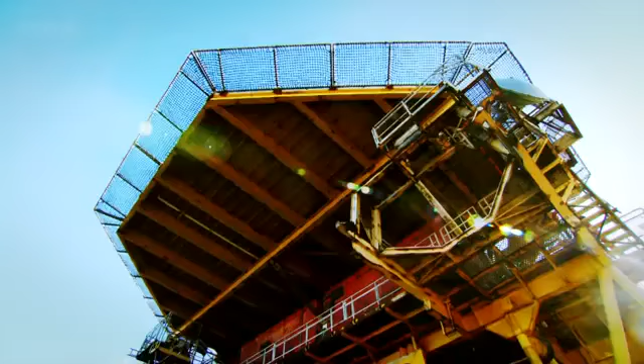This is the indefatigable Lima platform. It's the last remaining offshore rig in one of Britain's most productive gas fields.

Made up of 2,500 tonnes of steel and almost 15 miles of pipework, it's brought over 1 million cubic metres of gas up from deep below the sea. For almost 40 years it's kept us warm, supplying gas to 5 million homes.

We were the young pioneers in those days. We were the ones bringing oil and gas to the UK. It was exciting.

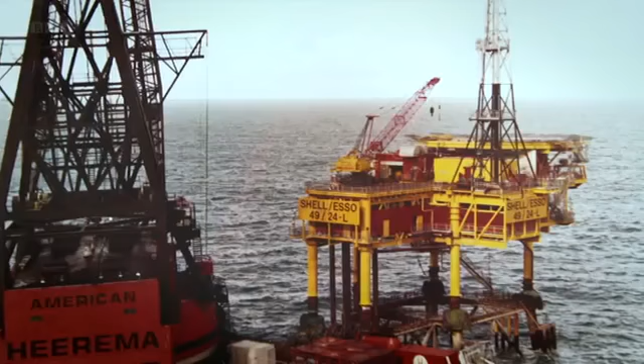Now, this giant is about to be demolished. It's going to be an immense engineering challenge. You just keep watching it and your heart's going thump, thump, thump.

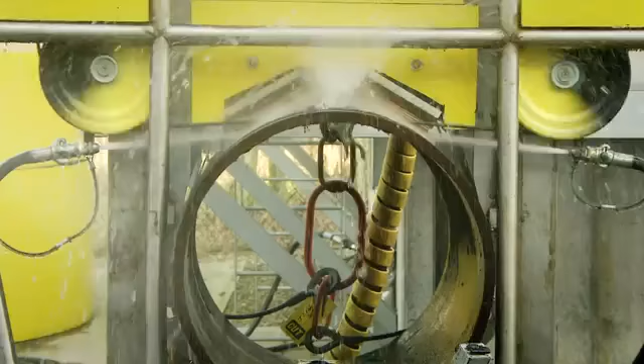Diamond-coated wires will attack 2-inch thick steel. It allows the machine to just keep cutting and slicing. Gas axes burning at 3,500 degrees centigrade will bring it to its knees.

It's an emotional time for the men who put her up, the North Sea Tigers. That's 40 years of my life, now gone.

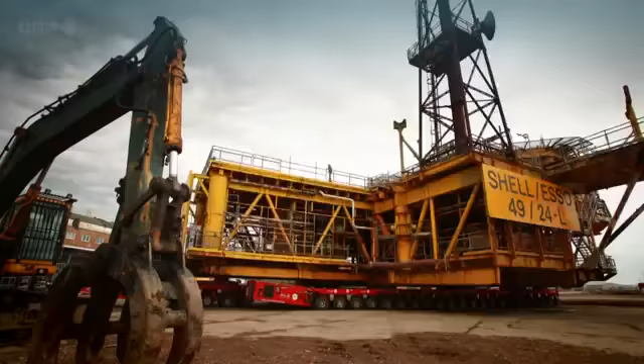Taking her down will require remarkable technical skills and will provide a unique chance to see right inside this enormous installation. Okay, could we get that hook reset, please?

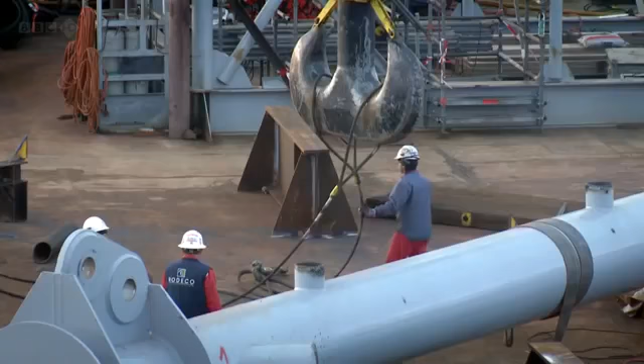Lima was at the heart of the indefatigable gas field, which was discovered in the 1960s, 70 miles off the Norfolk coast. Now the gas has run out and it's being decommissioned. The whole project will cost £1.5 billion and involve the expertise of more than 1,000 engineers. Removing every last trace of Lima will take 9 months.

I'm Rob Bell, a mechanical engineer, and I've always loved to get my hands on complex machines to discover how they work. I'm Tom Wigglesworth, a trained electrical engineer with a passion for big machines.

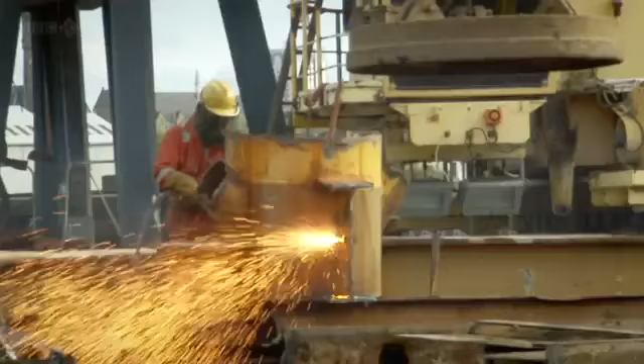As Lima makes her last journey from the North Sea back to British soil, we'll be taking you through every critical stage of the engineering process. And as she's torn apart, we'll uncover the secrets of how one of the world's biggest machines works.

Few people know Lima's secrets as well as Austin Hand. He worked on her construction at Lowestoft almost 40 years ago.

It started in Middlesbrough where it already slipped on schedule, so Shell decided to bring it from Middlesbrough down here to finish it off. Right across here? Just on a barge moored against the quayside, yeah.

Austin's come to meet 2 other Lima veterans, Bill Lindsay and Mick Needham. They haven't seen each other in over 20 years. For a long time. How you doing? I'd like to say we haven't changed much, but... I'm doing great, really. Yeah.

Probably the first time I ever come across you was on Lima. That's right. You know, that was who I am, and you were the main man.

For me, what's quite special is that you guys were the pioneers, really, of North Sea gas and oil exploration and getting the platforms out there. It's exciting, but it's a big learning curve as well for all of us.

We were only young lads. I joined Shell in 1971 as a 22-year-old, having worked in power stations, and didn't even know what an offshore platform looked like. 5 years later, I'm building them.

In them days, the southern North Sea was quite a family unit. We didn't have too many people coming in internationally, it was mainly local lads, and they kind of all stuck together. And I think these days that's changed.

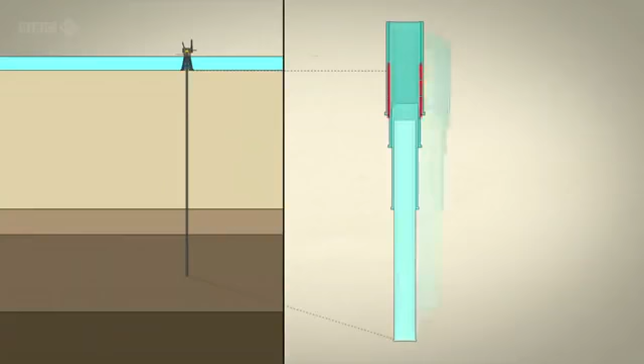Their first major job is to plug the wells and sever the gas conductors. The Lima platform had 6 wells, each tapping into a separate section of the gas reservoir 2 miles under the sea. The only way to bore that deep is to brace the well in sections as it's drilled. Each time a smaller pipe is passed down and the join sealed with concrete. These are known as conductors.

Now Lima's wells have been plugged in 4 places with cement and the conductors are ready to be cut. You end up with pipes within pipes within pipes, so you've got concentric rings of pipes. Once the conductors have been cut, you'll actually see something that's like a dartboard effect, where you've got concentric circles within each other with concrete between them.

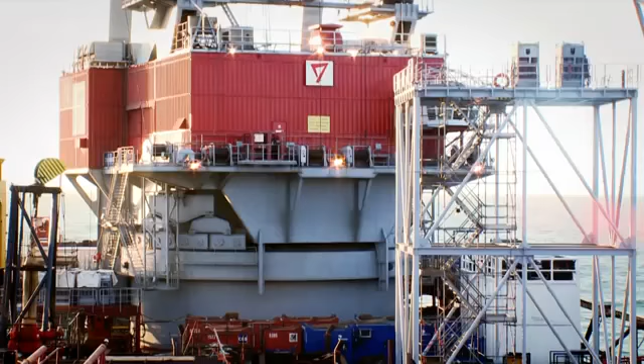Cutting through these materials would be a challenge on land. But this surgery needs to be carried out 30 metres under the surface of a stormy North Sea. Matteo Mosca helped develop an ingenious cutting solution, one of the many methods used in North Sea decommissioning.

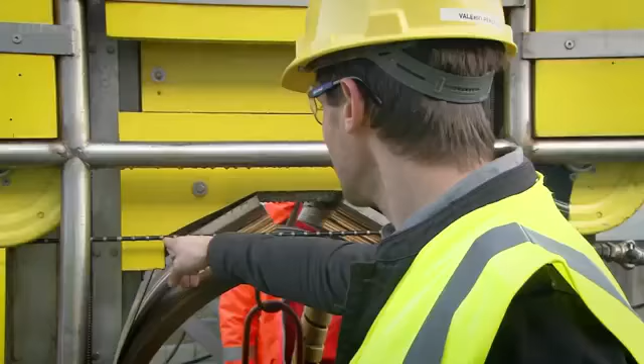So what have we got on there? On this wire, which is just a steel strand wire, you've got embedded these diamond bits, these elements which are covered with synthetic diamond. Then the wire is constructed as an endless loop, a continuous endless loop, and it grinds its way through, giving a good finish. It doesn't alter the physical structure of the metal, and locally it doesn't heat it. So can we actually see this cut through? Yes, that's what it's made for. So let's go.

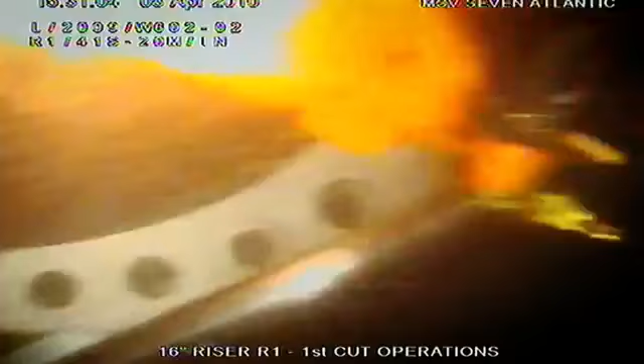Back out in the North Sea, this process is happening 30 metres below the surface of the water. These cameras help guide divers as they manoeuvre the diamond wire cutter into place. Let's get cutting.

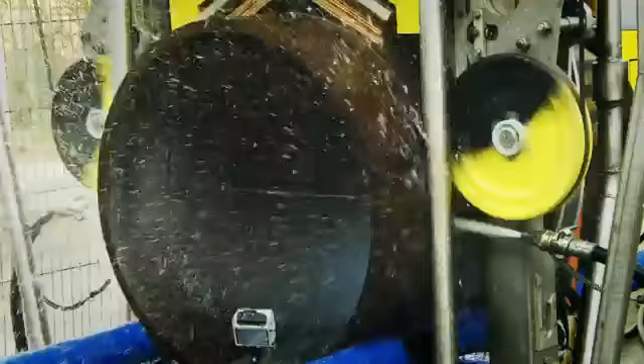The amount of friction created by the cutter can heat up the steel so much that it begins to warp, so it has to be cooled by water. The saw working out on the Indy field has the cold North Sea to do the job, but for this demonstration here on land, cold water must be sprayed on to dissipate the heat.

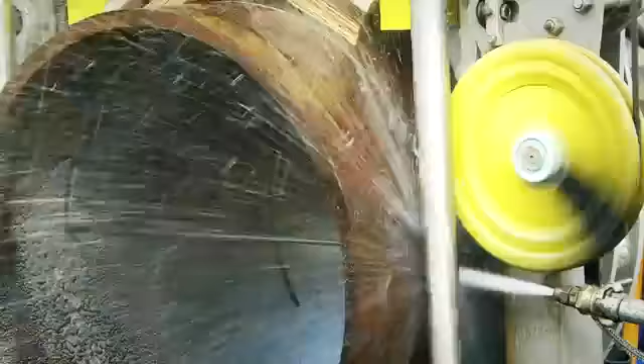The thing for me which really drives home that this is quite a clever piece of kit is that you've got thousands of tons compressing down, and this cutter allows you to cut across that without it getting jammed. A jam deep underwater would halt proceedings and cost tens of thousands of pounds to put right. This, because it cuts all the way around the wire, not just forwards but also above and beneath it, allows the machine to just keep cutting and slicing right the way through. It's a really impressive cut.

On Lima, with the wells plugged and the conductors cut, they'll be able to move on to a bigger challenge: removing the 2,500 ton platform. This scrapping represents the end of an era. The North Sea veterans who put Lima up know how tough it will be.

34 years ago, as a young man, Austin Hand helped bring it into the world. Now he's in charge of decommissioning on one of the North Sea's biggest projects. That's me and my boss, Gordon Box, who was the guy who actually recruited me into Shell. I've been involved in this for 40 years, either design and construct. My first foray into the offshore business was Indy Lima. That's Lima in the background, parked at the quayside in Lowestoft after we'd brought it down from Middlesbrough. So that was us beginning to get it ready to go.

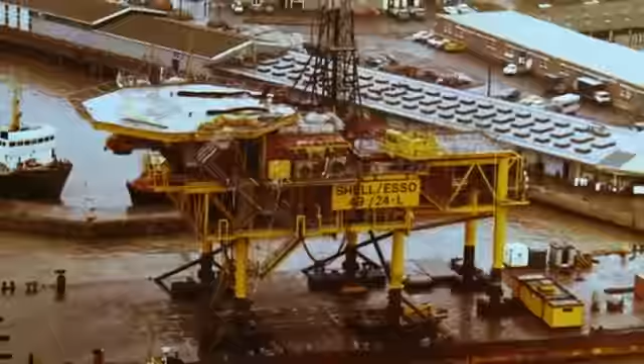The platform has to withstand 15-metre high waves and winds of up to 100 miles an hour. The legs, or jacket, are all important, fixing Lima to the seabed. Removing it is going to be a mammoth task and will require as much engineering ingenuity as went into building her. So the jacket's basically a frame, and you place it on the seabed, then you put piles in, like pinning it, and you drive the piles with a big hammer into the seabed. That is a piling hammer.

So it's about 60 feet high. Now, above all these exciting things to do, one of my jobs was to stand out all night with a clicker, counting the number of blows of the piling hammer. You got all the good jobs.

Lima's removal from the North Sea will involve taking away not just the jacket, but the piles as well. Before that happens, I want to understand exactly how she was constructed and secured out at sea. I've got to show you how it works, though.

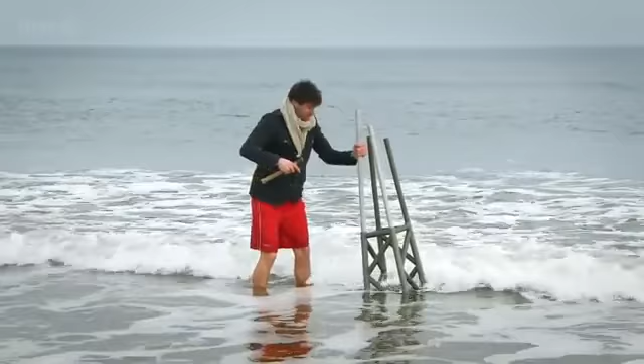Obviously, on Lima, this was done a hell of a lot further out at sea. How do they actually get it out? They built the jacket on land, then took it out on a massive barge. But the jacket is basically only there as a guide for the piles, and these are what take the whole force of the topside, going down into each of the legs. On Lima, these piles were being driven 90 foot into the seabed.

Must be a very noisy job. It is a very noisy job. That's why they do it so far out at sea, so they don't disturb anyone. That is going nowhere.

With the legs firmly embedded, the final part of the construction was to add the topside. Now, 40 years on, removing that topside is about to be the biggest test so far for Lima's decommissioning team.

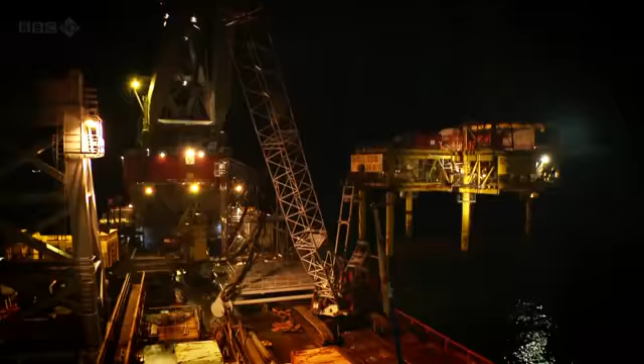Weighing in at 1,350 tonnes, this is the heart of the rig, where the crew lived and worked, processing the gas before piping it to shore. Cutting it off the legs will be an enormous challenge, requiring knowledge, skill, and nerves of steel.

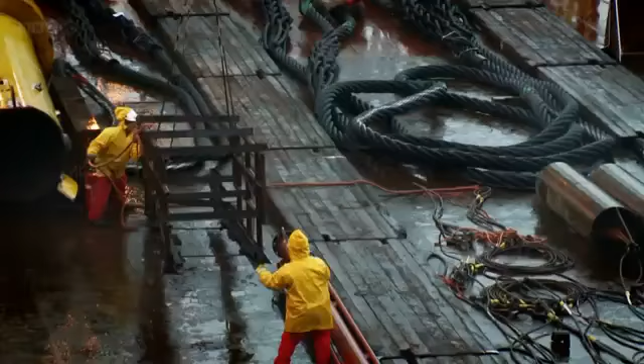The problem is, how do you cut across the legs but still ensure the platform stays in place until craned off? If for some reason we had a storm blow up and we just did a straight cut, potentially the wind and the weather could vibrate the topsides and start to move them, especially if it's just on a flat surface. The last thing I want to do is have to go fishing to get the topsides off the seabed. Lives could be at stake if they get it wrong.

So a simple but ingenious solution is integrated into how they sever the legs. The cuts are shaped like castle ramparts. These cuts are absolutely genius and crucial to the whole decommissioning process. Having made the cut through the jacket, the topside rests on that. What the castellations do gives the whole thing a lot more structural integrity. But when it needs to be lifted, the crane comes in and it's taken up. Genius.

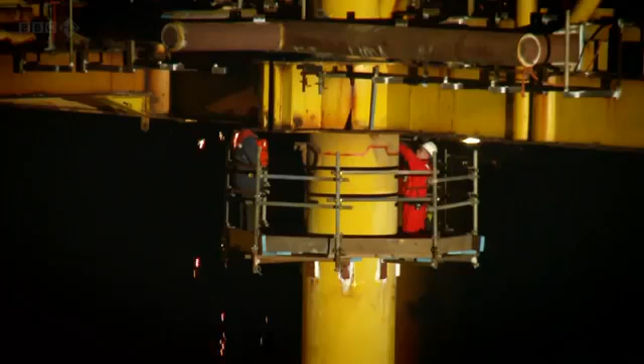The final castellated cuts are made to Lima's legs, leaving her 1,300-ton topside precariously balanced on top. The worst thing that could happen at this stage is a storm. The castellations could be brutally put to the test.

But the morning sun reveals that Lima's topside is still in place. Now it faces a new test.

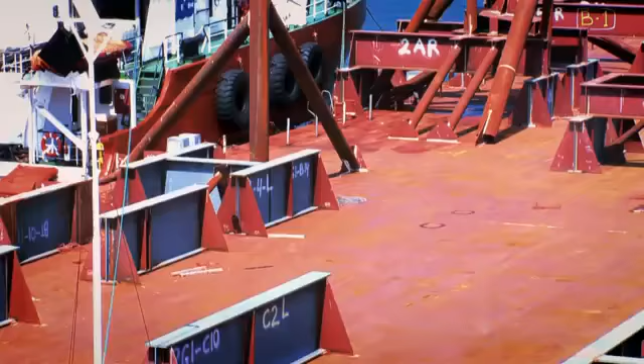This part of the operation is incredibly dangerous. It uses a floating crane that can lift 2,500 tons. That's as much as the Blackpool Tower weighs, which is why it costs almost £500,000 to hire every day. Then, in order to float more than 2,000 tons of steel back to land, a barge is needed. This one is as big as a football pitch.

At this moment, there's only one thought running through Mick's mind: is it going to be level? The entire lift is based on complex calculations, which allow the crane to ballast itself against Lima's weight. But these calculations are estimates. You're doing a theoretical model of not only the topside's weight, but where the centre of gravity of that topside is, and they're about to find out how close to the truth they are.

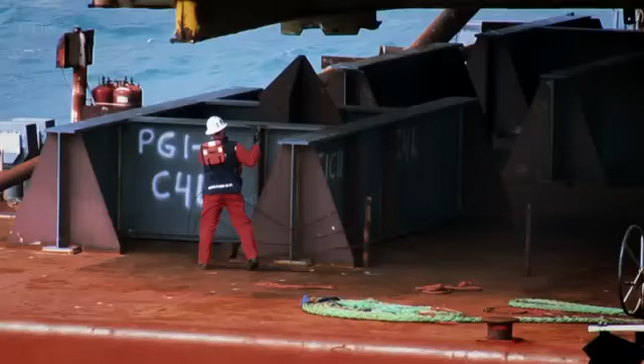The platform is successfully lifted off its legs for the first time in 30 years. More than 1,000 tons of steel are manoeuvred with precision safely onto the barge.

With stage 1 complete, the engineers will turn their attention to the legs. These are embedded deep into the bedrock and must be cut off below the surface of the seabed. The task is tricky and will require an even more ingenious solution.

But as preparation for Lima to leave the Indefatigable gas field continues, I want to find out more about why she ended up there in the first place. For geologist John Underhill, gas and oil exploration is a lifetime's work.

I have this strange belief that under the sea, when you go drilling for oil, there exist pools of oil, pockets of gas, large, sealed off sections that we drill and tap into and then it all comes releasing out. Is that true? Well, it's a popular myth, really, that we float on a reservoir of oil. In reality, it's solid rock with what's called pore space between it, so air pockets that can be filled with gas or with oil. These air pockets, less than a millimetre in size, fill up with gas over millions of years. The pores make this kind of rock soft and easy to drill.

So soft you can even feel it. I'm moving grains of sand because they're coming apart and they're on my fingers. So that's breaking apart. That is a porous rock. The very same rock formation that makes up Lima's gas field off the Norfolk coast travels the length of England and emerges on land here at Tynemouth in the northeast.

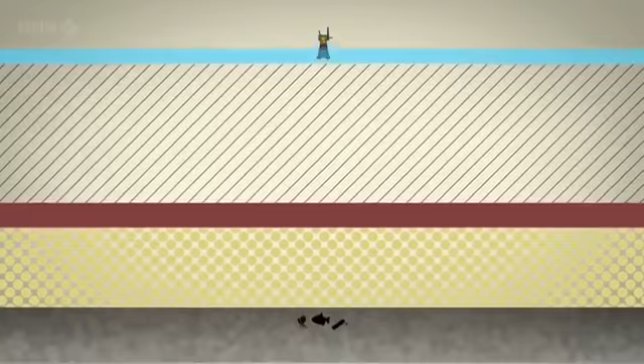Under the right conditions, gas is formed from the remains of organic matter, compressed under rock for millions of years. This layer is known as the Carboniferous layer, or source rock. Above this, porous rock holds the gas like water in a sponge, in the gaps between its grains. Finally, a layer of hard, non-porous rock, known as the sealing layer, forms a cap, locking in all the gas, until someone drills a well.

There are two types of source rock. One is oil-prone and comes from either marine sediments or lake sediments. The other type is from woody material, coal, that gives a gas-prone source rock. So it's marine life that gives us oil and then land life that gives us gas? Primarily, yes. And here, in the cliff face below Tynemouth Priory, we can see how the source rock lies beneath the sealing layer, identical to that found in the Indy field.

At the base, we've got the Carboniferous, which is the source rock level. Above that, we have the reservoir unit, the yellow sands. And above that, right at the top of the cliff, the recess at the top of the cliff, is the sealing unit, which keeps the gas in the reservoir underneath the North Sea. And all three are exposed here in this cliff line.

Out in the North Sea, with Lima's 1,300-ton topside removed, the next big challenge is to sever the 10-storey high 1,085-ton legs from the seabed. All trace of Lima must be removed to satisfy a so-called clean sea policy, triggered by a dramatic event in the North Sea 17 years ago.

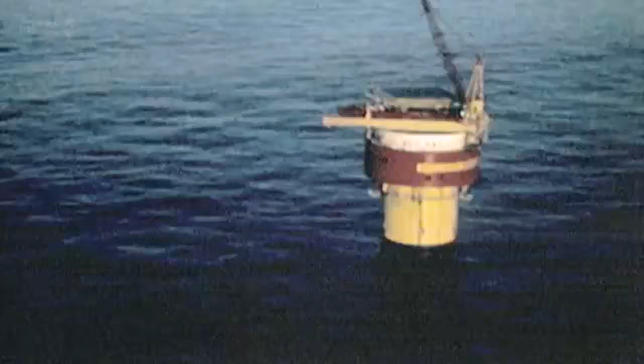The Brent Spar was a gigantic oil storage facility from which oil tankers transported the oil to shore. By 1995, a pipeline had been installed, so it was no longer needed. Shell had a plan to dump it by towing it into the Atlantic and sinking it. Greenpeace saw this as a potential environmental disaster, so they sailed out and took control of the Spar, a protest that would make international news. In a blaze of bad publicity, Shell reversed their decision and instead towed it to shore to be recycled on land and put the rest of the Brent field decommissioning on ice.

17 years later, the process has restarted, and Austin Hand, who began his offshore career building Lima, is in charge. Did that kind of act as a precedent for how all the fields and the platforms are now decommissioned? We thought it was a reasonable and logical thing to do, to take it out to sea, 2.5 miles down in the Atlantic, and place it in this kind of valley on the seabed. We didn't do a very good job of explaining that. So basically that resulted in the Oslo-Paris Convention of 1998 that said, roughly speaking, you put them there, you take them away. Okay. A clean seas policy. And that's what Greenpeace strove for, and that's what they succeeded in getting.

There's so much involved in this that the cost of decommissioning just must be enormous. Austin's estimate, Austin's view, $100 billion. Of decommissioning? In the UK. There are those that would say, I don't believe you, Austin, you've overstated it. We'll see who's right in the end.

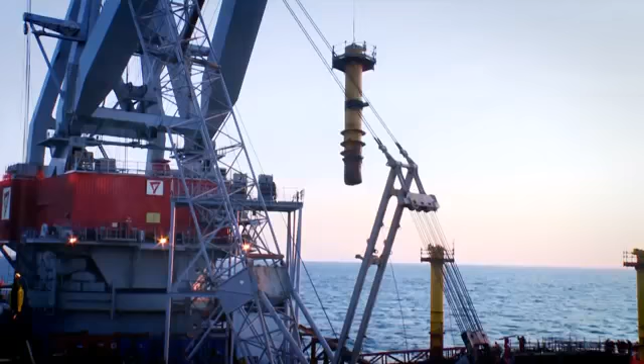As world expert George Jack explains, there's no blade, no flame, just water and grit. Is it the seawater that you're using there as your... Yeah, we take filtered seawater in through our pumps, pump it, take up the high pressure, and then introduce the abrasive to it as well. Yeah, that's the actual garnet we introduce to the water. Oh, that's pretty hard stuff, is it?

Yeah. Garnet is a dark red, silicon-based mineral. Although large crystals are used in jewellery, some types possess strong atomic bonds, which make them very hard, and ideal as industrial abrasives. If you don't have that in your water, there's not enough friction to cut through the actual metal. Okay. George is about to demonstrate to me the power of cutting with water and garnets.

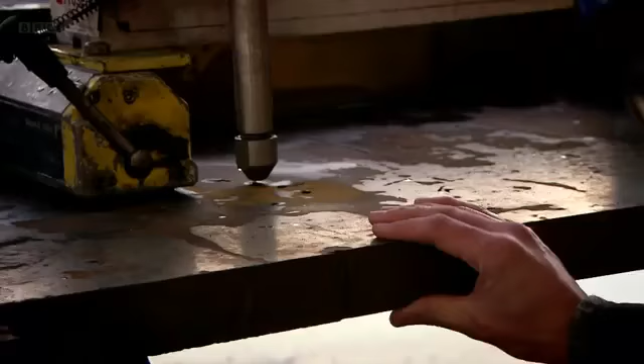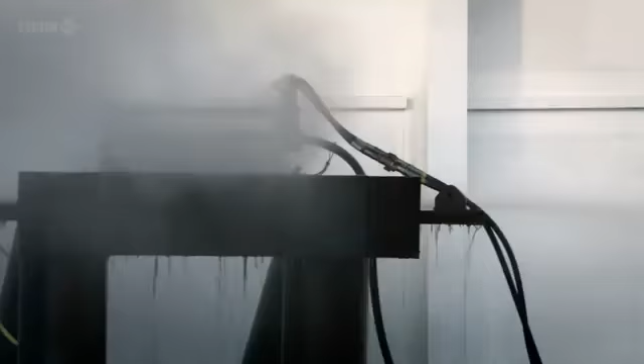There we go. Look at that. You'll know as soon as it starts coming through, you'll see the water coming underneath. Whoa, now you can see it's just gone through. So that's 50 millimetres of solid steel, and that's just 50 millimetres, yeah.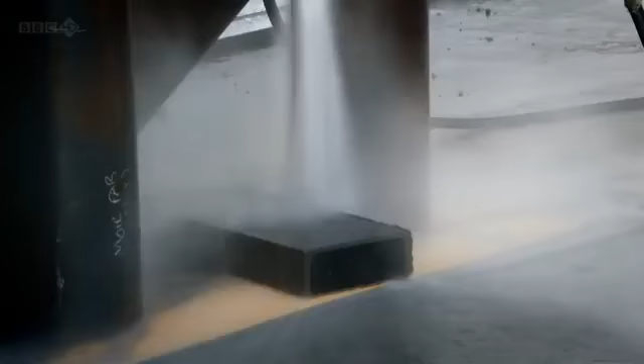So compared to, say, a high-pressure jet hose that you might get for washing your car or doing your patio from the hardware store, if you tried to do that with this thing, you'd probably do more damage than good, right? Oh, yeah. The pressure, we have barely read on one of these gauges. The first line on that, go up in thousands.

I'm not quite sure what kind of cut I'm expecting. Is it going to be a clean cut? Is it going to be quite jagged? I don't know. Here we go. This is 10 minutes worth of cutting time. That's clean. That's a really straight, clean cut.

Yeah. Bit of the old Paul Daniels, Debbie McGee. It's gone right the way through. Yep. Right, so this is not for domestic use? No, not for domestic use, I'm afraid.

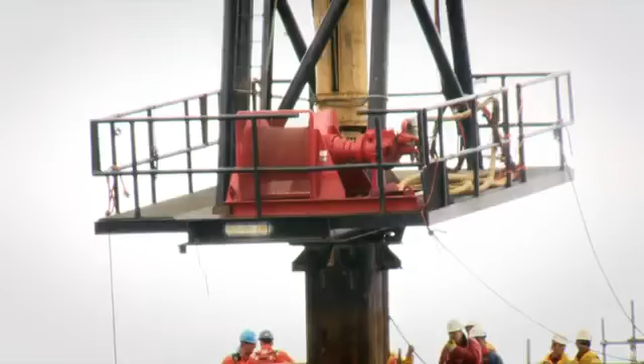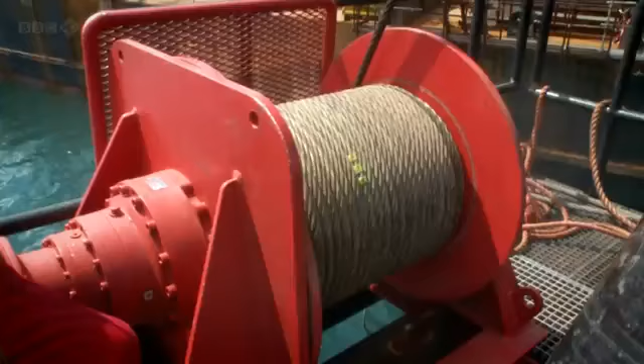The Lima engineers are ready for the high-pressure water cutter. With the topside removed, they're able to lower it down right inside the legs. In theory, if the severance isn't complete, the crane could pull the Stanislav Yudin over. In practice, fail-safe mechanisms would prevail, but an incomplete severance could still cost millions. We control it from the top side using our hydraulics and everything. Okay. And it'll do a 360 degrees subsea, just 3 metres below the seabed.

Before they begin the cutting, every precaution must be taken. The system is pressurised to 6,000 pounds per square inch. Any leak or breach could be deadly. An exclusion zone around the cutter is strictly enforced. Because we've got high pressure hoses running across the deck, if you put your hand up like that, you're not going to have anything left. Calculations estimate that the 360-degree cut of each leg should take 75 minutes. All Mick can do now is time it and hope.

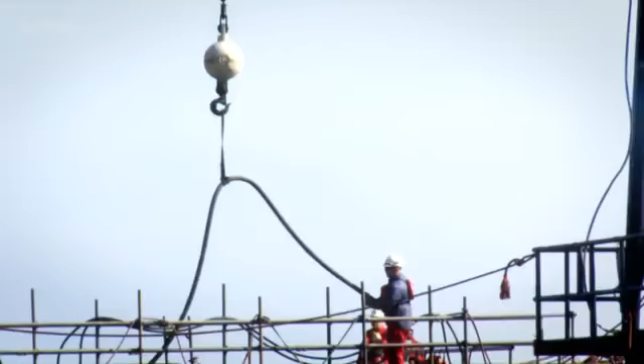Once the allotted time has been given to each leg, special slings are attached. So all the slings, they're not just something you get off the shelf. All these slings are engineered and designed and built to the length required.

Now the crane must ballast itself against an unknown payload. Up to 300 tons of extra weight in marine life could have accumulated over 4 decades, making the jacket 1,400 tons, as heavy as 7 jumbo jets. All this makes the calculations for the stability of the crane more and more difficult. It puts the ballasting power of the Stanislav Yudin yet further to the test, and their stability in more jeopardy.

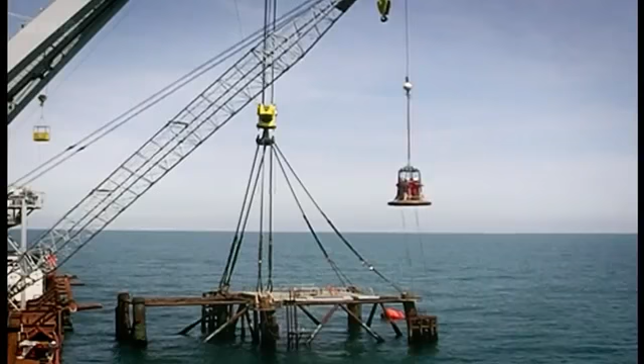And then the big tense moment for everybody. Because we are now going to start to lift the jacket, but there's one thing we can't do. We can't actually 100% guarantee they're cut by going to have a look at them. You hear the crane driver, he starts taking the weight on the crane. 1,200, 1,400 tons, somewhere in that region. And if he gets to 1,400 ton and then he starts saying, I'm at 1,450 now, you're thinking, I hope this is going to move shortly.

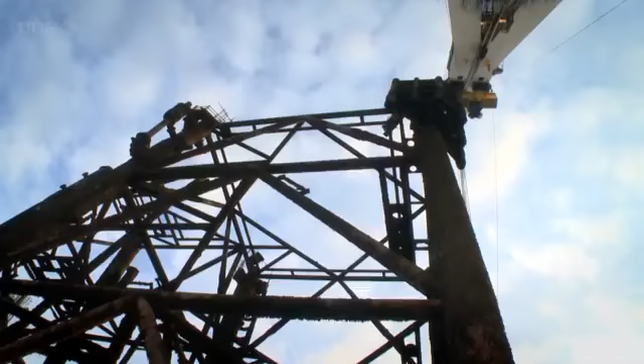And your heart's probably going thump, thump, thump. And then all of a sudden, it just seems to go, oh. And it's a great sight, that. And it's a great relief. After the final lift, engineers work through the night to fasten Lima safely to the barge, upon which she'll make her final journey.

And that was it. It was an end of an era for not only myself, but for so many people that have worked on the Indy field throughout the last 40 years. In the dead of night, she leaves the Indy field behind forever and sets off on the 200-mile journey home to the northeast. Mick's relationship with Lima has finally come to an end. Indy produced for so long, brought lots of people work, and more than that, lots of great friends and happy memories. I think that's what'll stick.

I'm choking up. Oh dear. I can't believe that. Excuse me.

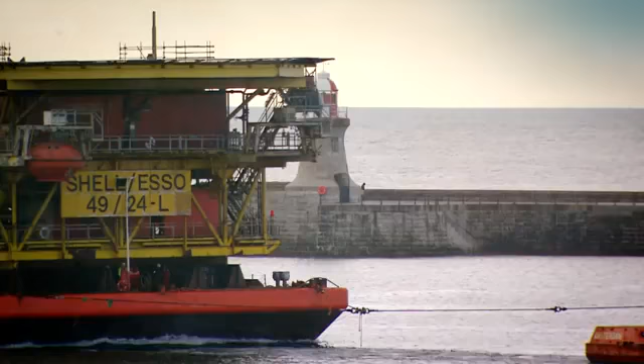But for Lima, this marks the start of the next phase of deconstruction. As dawn breaks over the horizon, Lima arrives at the mouth of the River Tyne. From here, she'll be taken to the famous Swan Hunter shipyard for demolition. It's amazing to think something like Lima, how important that was to us. We just don't really consider that at all, really. It's delivering all that gas to our homes, keeping us warm, cooking our food. Well, the Indy field actually produced enough gas in its lifetime to power the UK for a year and a half. Just in one gas field?

Yeah. At the Swan Hunter shipyard, they must wait for the tide to be just the right height so the barge is level with the quay. Only then can the painstaking process of sliding over 2,000 tonnes of steel off the barge onto land begin. You don't see one of them come over every day, do you? 4 remotely controlled bogies with a total of 56 axles, each capable of supporting 36 tonnes of weight, manoeuvre Lima into her final resting place. Fantastic. Now, the next chapter in her story is about to begin.

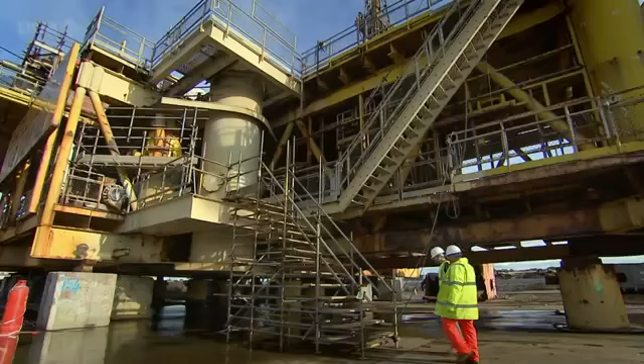Ivan Rain is Geordie born and bred, and is another person whose relationship with Lima and her sister platforms goes back to their construction in the 1970s. But you didn't have to wear all this kind of stuff back in the 70s, did you? Yeah, we did, but once you got offshore, if you ever mentioned the word safety, you're on the next helicopter home again. He too has come a complete circle. He's now here to oversee the demolition and recycling of Lima.

All these pipes and valves, everything we can see around, it's all dedicated to getting that gas up out of here. The main function of this platform is to gather gas from the seabed, and the gas will be brought up through 6 pipes, brought into this system here, and then redirected to another complex where it is collected, and then it's sent to the UK mainland for refining, and then it gets redistributed throughout the UK, and it comes into your house, and that's what you use for cooking your roast beef on a Sunday.

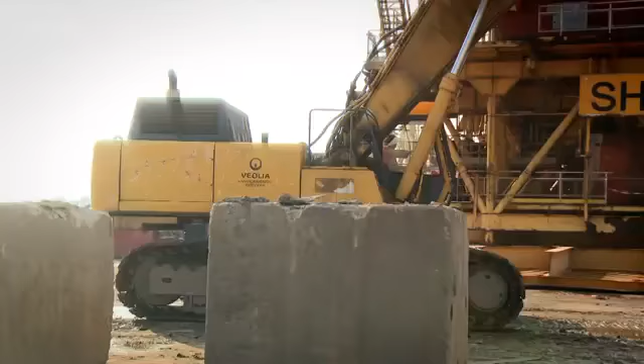For Veolia's recycling team in charge of the demolition, this is no ordinary takedown job. So this has been out in the North Sea for 40 years. Where do you start in taking it all apart and recycling it? The helideck will be cut off and pulled over, and then they'll start dismantling it section by section. Once that's flattened, they'll start cutting it up into very manageable pieces. And the smaller the pieces, the better the value they get for recycling, for transport off the site.

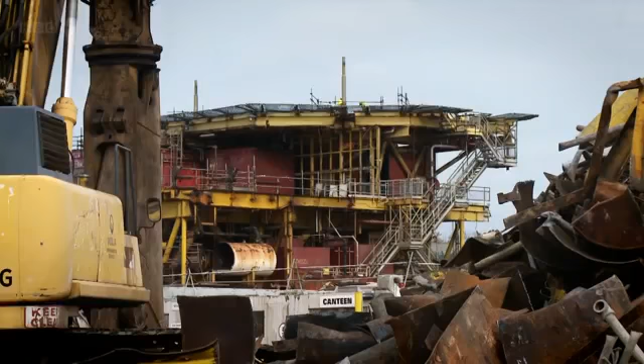All right, so now we're talking money. Typically, what are we looking at for recycling this whole platform? Could be looking anything from 180 to 200,000 pounds. Wow. Scrap value. After 40 years of service, providing gas to millions of people, and jobs and even a home to hundreds of North Sea tigers, Lima is finally about to be brought to her knees.

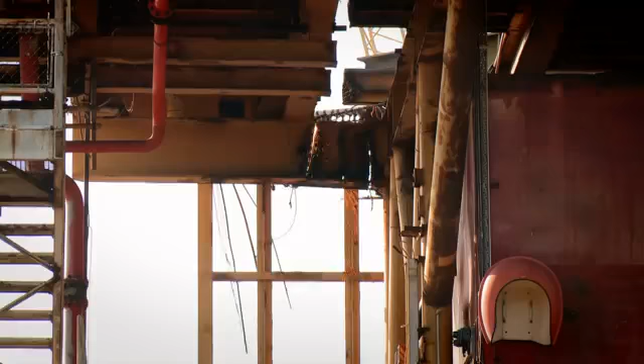First, her infrastructure is weakened by strategic cuts. Next, it's time for the excavators to really get to work. Steel wires are attached to the helideck, and the machines go into reverse. This red accommodation module is next for demolition. Its fixings to Lima's frame have been severed, and the excavators are standing by.

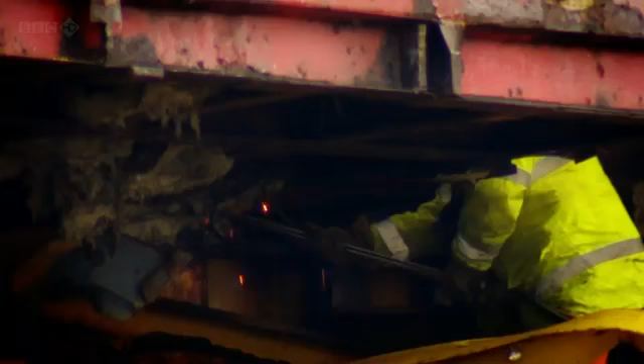Mick Cubitt spent 4 years living and working on Lima as an electrical engineer. It's almost 19 years to the day since he last saw her. The place is incredible. It's like a bomb. A bomb has hit the place. In fact, it's bordering on unrecognisable.

I don't want to pull any more emotional punches on you, Mick, but I think that is your old bedroom, that red tin shack over there. I'm afraid so. I spent, in effect, the equivalent of 2 years' worth. So it's 4 years, half on, half off. That's right, yes. Some 700 nights spent in that little tin box.

So we've had to walk into your accommodation block, Mick. This is home sweet home. Home sweet home looks fairly devastating to me. It's really had the insides ripped out of it now. So this was the living area then, Mick, was it? This is where you passed the time? Well, prior to the introduction of satellite television, we used to show films that were hired in by the company. Like your own little blockbuster?

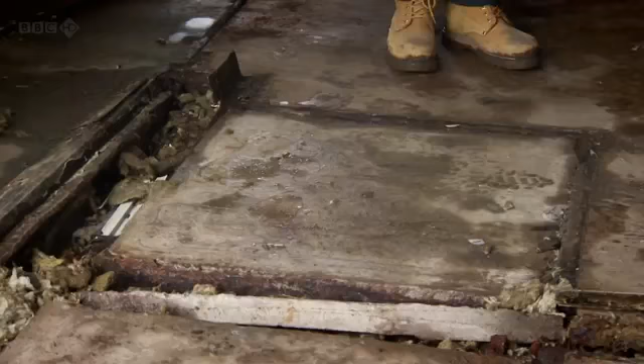Yeah. So, Mick, this must have been pretty cramped. How many people lived in here? This was accommodation for 4 people, two lots of bunks. The shower for all 4 was in here. That's the shower tray with a wash basin placed just here. Shower, wash basin. And that was it. That was your emergency exit.

So, Mick, it's the middle of the night, you're asleep in your comfortable abode, and there's an emergency alarm, the worst case scenario. What's the order of service? 3 offs. The 3 offs being block off, where you would block in all the wells, stop the gas coming onto the platform. You would then vent off. And what's the 3rd off? You just off. Follow me. Okay. Quickly, Mick. It's an emergency situation.

For Mick's Lima colleagues, reunited in Lowestoft for the first time in over 20 years, all that's left are photos and shared memories of their incredible offshore lives. Is that you? Is that you, Pete? That's me on Lima. How many times would you have been offshore at that stage, do you reckon? Probably not many. Yeah. We used to fish, didn't we, Tony? Sure, there is some entertainment to be had.

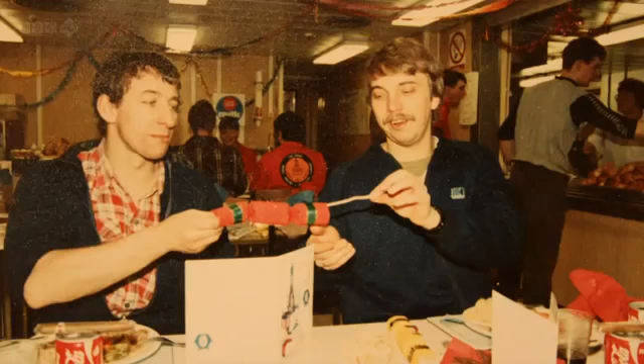Made our own entertainment. What were the food supplies like? I mean, did you eat well? Ate very well. You would have a choice of a fillet steak, a bit of fish. That's a decent spread, that, isn't it? It is indeed. Christmas crackers. Yeah. Explosive devices offshore. If you had a good chef, you had a good platform, and you had a productive platform. That's one thing I really take away from this whole process: it isn't just the hardware. It isn't just all the steel. It's the family of all the people who've built it, worked on it.

How does it feel now that particular field and Lima platform's not there anymore? Does it kind of sit with you, does it rest with you, or...? When you finish, you think, you know, that's 40 years of my life. Yeah. You know, now gone. You just realise how old you're bloody getting.

Back at the Swan Hunter shipyard, another relic of the glory days of the North Sea has been uncovered. A stark reminder of just how treacherous it can be. So this looks like a horror story, Mick, but I believe it was just the heli deck. When they removed it, it smashed into the front there. But this is your survival raft, isn't it? Yes, this was the Whittaker capsule, as it was known on the platform.

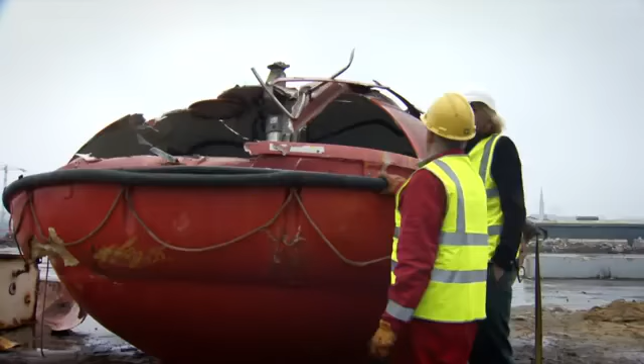Awful thing to steer, being circular, and an awful thing to ride in. Were you the captain? I have done the coxswain's training on here, and I've been to sea with guys who are happily throwing up, and it is not the best place to be, even with a dozen guys in, when you've got a couple of them throwing up into their hard hat.

I'm hoping that years of training means that my Lima veterans have grown stronger stomachs, because I'm about to get my first taste of the Whittaker pod experience. And this is exactly the kind of one you had up on Lima, is it? Absolutely, yes, identical. Identical. Well, luxurious, was it? No, that's how we became friends, you know.

Pods like these have safely evacuated more than 2,000 people in over 60 incidents around the world since Lima was built. So how long since you guys have been in one of these then? For me, it would have been 1978 in this particular type. I've been given the job of releasing the capsule, and it's fair to say that the speed of the response takes me by surprise. Right, we're off.

They were designed for the Gulf of Mexico, but the bobbing donut was no match for the waves and currents of an undulating North Sea. The survival pods, still vital for an industry which has claimed hundreds of lives, are now usually boat-shaped. I'm being shown the ropes by Nick Goldspink, who's been teaching North Sea Tigers how to navigate these pods since 1989. I mean, we're moving around like a boat, but still this round shape seems like a very odd design for a boat to me.

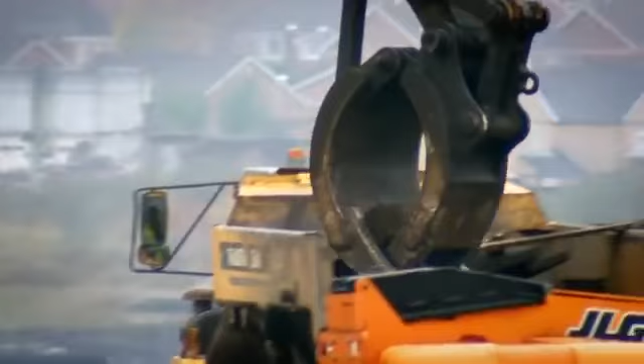Back on Tyneside, there's nothing ship-shaped about Lima, which has been slowly cut down girder by girder, making it no longer possible to trace the pathway that gas would have taken, snaking through miles of Lima's pipework from under the sea to our kitchen hobs. So to solve the mystery of how she worked, I'm going to see an offshore platform in action and trace the fossil fuel route. A little bit anxious. Never been on a helicopter before.

Thanks to gas and oil, Aberdeen Heliport is Europe's busiest, ferrying almost 500,000 passengers offshore every year. Across the North Sea, more than 100 lives have been lost since air transfers began, which is why every possible safety technique is used. I'm terrified. Absolutely terrified. In the event of the helicopter ditching, this suit will increase my survival time in the freezing North Sea from just minutes to about 7 hours. But I hope I don't have to put it to the test. After an hour of seeing nothing but sea, a platform comes into view.

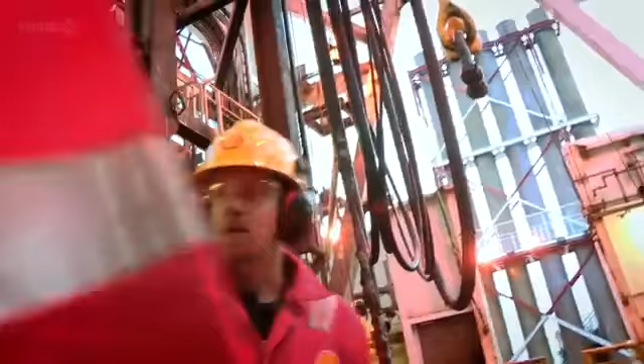100 miles offshore from Aberdeen in the northern North Sea, this is Nelson, which produces both gas and oil. The fossil fuels pathway on Nelson is very similar to Lima's gas pathway, so I'm going to track the route from under the sea to our homes and explore how current technology works. While Lima had 6 wells, Nelson has drilled 28. Nelson's manager, Nick McLeod, is going to show me the drill floor. Okay. Wow! Pretty impressive drills there.

Our wells here could go down as far as 20,000 feet. 20,000 feet? Yeah. And eventually we get down to what's called the pay zone. The pay zone. That's where the money is. Yeah. That's where the oil and gas is. Okay. What happens then? It all spurts up, doesn't it? And everyone cheers. Is that right? In the old days, hopefully not these days. The first crucial stage for the fuel that emerges is the well bay.

Everything's moving about and juddering. Really noisy. Absolutely unbelievable, to consider that they've made this size of machines. It's even more incredible when you realise that we're 100 miles off the coast.

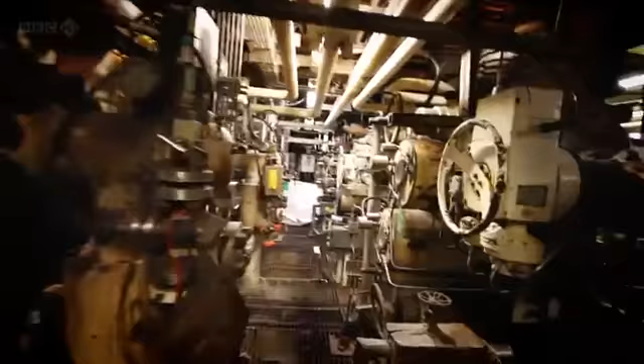Production engineer Murdo MacDonald is here to explain the first step of the fossil fuels pathway. Oh, there's not a lot of room in here. Which involves something known in the trade as a Christmas tree.

Why is it actually called a Christmas tree? Maybe it's because they look like they've got branches coming off them, with all the gauges hanging off. You've got quite an imagination if you... Yeah, you've got quite a strong imagination. You have to, with 2 weeks offshore. Yeah, that's what it is.

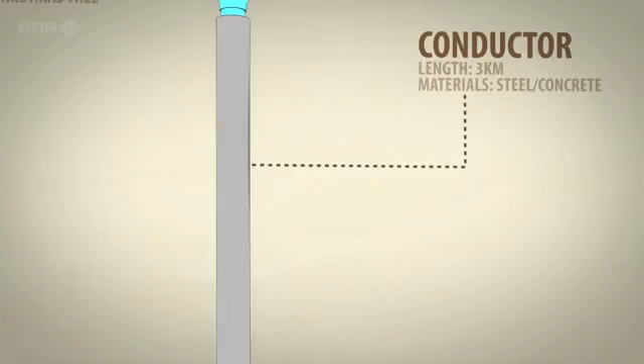When a well's drilled, the raw fuel comes up the conductors into the well bay. On Lima, this was gas. On Nelson, it's gas and oil. Here, the Christmas trees, large assemblies of valves and gauges, help control the flow of oil and gas entering the platform.

I'm ready for my first offshore job. 5 turns. 1, 2, 3, 4, 5 turns. What have I done? Just close the choke about 5%. Just closed the choke 5%, which has restricted the oil flow coming up the... Absolutely.

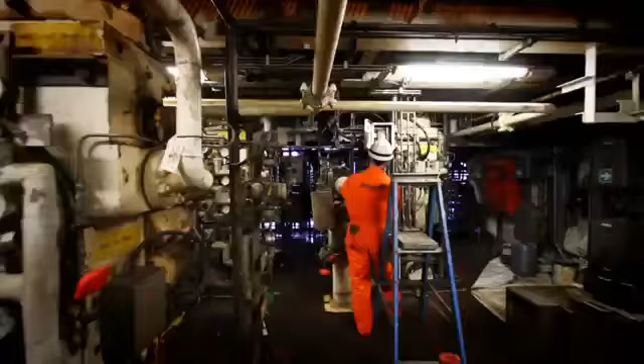Stage 2 of the pathway is all about separating what emerges from the well into its constituent parts. Like a science fiction film. When a well is drilled, oil comes up the conductors into the well bay, but it's not pure oil - it's a mixture of oil, gas, and water. In order to extract the valuable oil and collect the gas, the whole mixture is sent to one of the most important devices on the platform, the separator.

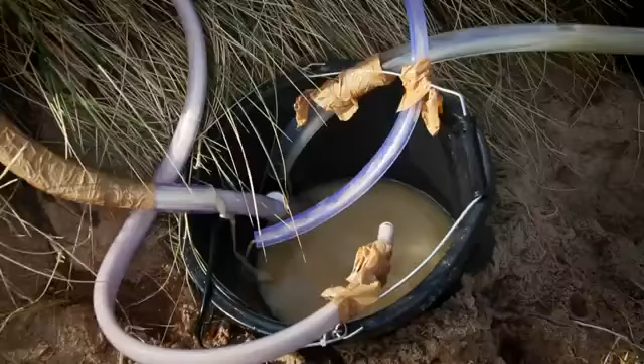I've made a model of Nelson's separator to explain to Rob how it works. It's bafflingly simple. We have here a bucket, which to the casual observer appears to be a generic brand cola mixed with vegetable oil, which is actually exactly the same as oil, water and gas, right? That's what's coming up from the bottom of the sea. So we've got a pump, but normally that's got enough pressure to be forcing itself up. Exactly, that would be pushed up under its own steam. Yeah, so what you do, you separate them out.

The gas will naturally float off to the top - lighter than both of them. So that'll normally be tapped off into wherever else it needs, and processed. Water is heavier than oil, so this weir is very important because the oil floats on the water. You see that easily here - the brown stuff is the water and the creamy stuff is your oil. Exactly. Because the oil is floating on the water, it flows over the top of this weir, creating this secondary chamber, which is pretty much all oil. So coming out of here, you get pure oil. Coming out of the bottom of this section, you get flat cola, or water. Yeah, coming out the top, gas.

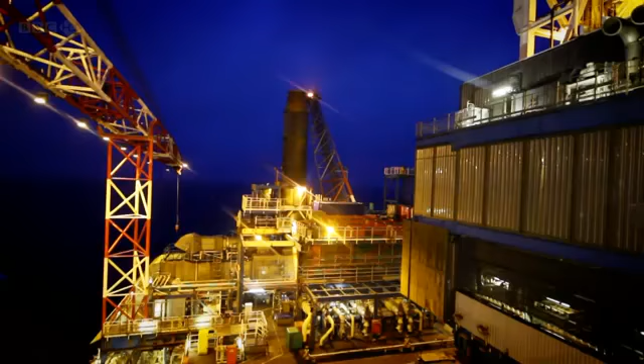This separation stage of the fossil fuels pathway is vitally important because it tells the energy company how much gas and oil they're producing. To do this, every day each well is taken out of production and diverted into the test separator.

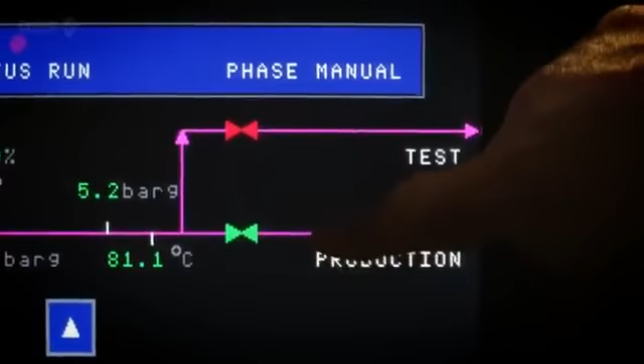You too? How's it going? In the control room, Pete O'Connor is monitoring the results. So that's the production valve there, the diverter valve, which is open. That's the test one, which is shut. So by putting it into the test separator, it lets us know how the well's performing - how much oil it's producing, how much water, how much gas it's producing.

All our wells now are starting to water out - they're all over 80% water. That didn't used to be the case? No, they all gradually decline in oil production. So the test separator is actually testing the mix of oil to gas to water? For each individual well, yeah.

We have a spot rate there, which at the moment can tell you we're doing 19,357 barrels near enough today. Wow. At that rate, Nelson produces oil worth around £1.5 million a day. Not a bad return.

The third and final stage of the fossil fuels pathway is exporting it. Water is cleaned and pumped overboard. Oil is cleaned and then pumped down the export pipeline to shore. But it's not all over for the gas - some is exported to gas terminals, and excess is burnt off on the iconic flare stack.

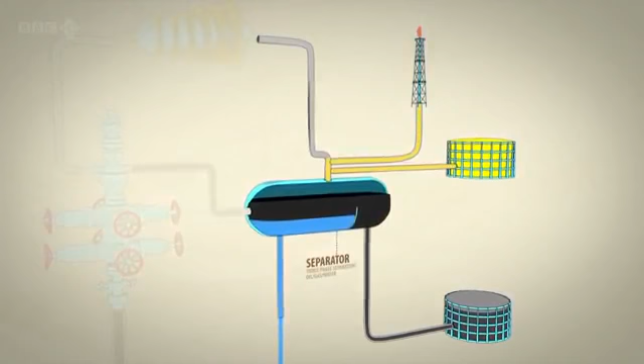But most of it is diverted to something known as the gas lift to do an important job. Because of the weight of the ocean on this trapped reservoir of hydrocarbons, it's all under pressure - which is kind of like this. So the moment the drill pierces it, wow, you've got oil.

The oil comes out, but obviously quite soon it loses pressure. So once they've been tapping the oil off, the field becomes flat, devoid of pressure. So instead of pumping it up, you push gas down into the reservoir, which makes the oil light because it's got gas in it, which then sends it back up. You basically make the world's biggest SodaStream.

The gas collected from the separator is compressed, repressurised and then re-injected back down the well via the Christmas tree, forcing more precious oil up.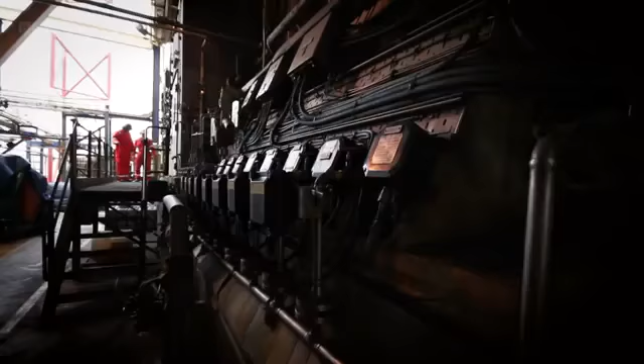The force required to do this is huge. On the platform, Murdo shows me where they get it from. It's a gas compressor, which is essentially a jet engine, and it's one of the noisiest things I've ever experienced.

The engine drives a power turbine that drives the gas compressor. The gas compressor takes the pressure from 5 bar from the production separator, takes it all the way up to 147 bar - that's 147 times atmospheric pressure. That 147 bar is then used in the header to re-inject back down the wells to lift the oil back up again. They're a powerful blow, aren't they, those jet engines?

I would say it's quite a blow, alright. Yeah.

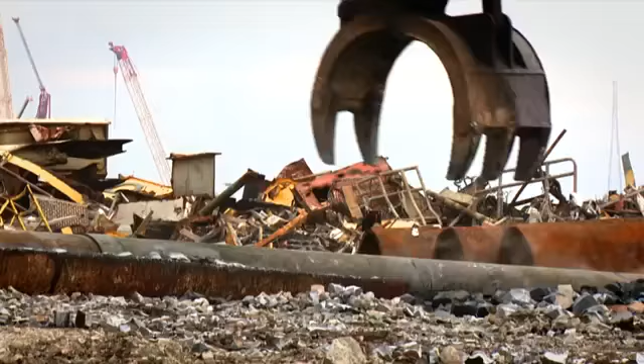But while Nelson's conductors are still full of North Sea gas, Lima's conductors now lie severed from the rest of the platform on the quayside at the Swan Hunter Yard near Newcastle. And demolishing them is going to be a feat in itself. Because of the way the wells are drilled and constructed, they end up with pipes within pipes within pipes, all sealed with thick layers of cement. Turning this into small pieces of scrap metal requires a process known as bombing.

First, the gas axe is used to cut along both sides of the long steel conductor. Then, to get at the inner pipes, the excavator steps in. Once it's made short work of the concrete, the inner steel pipes are revealed and the process starts all over again. With over a third of a kilometre of conductors to scrap, it's a lengthy process.

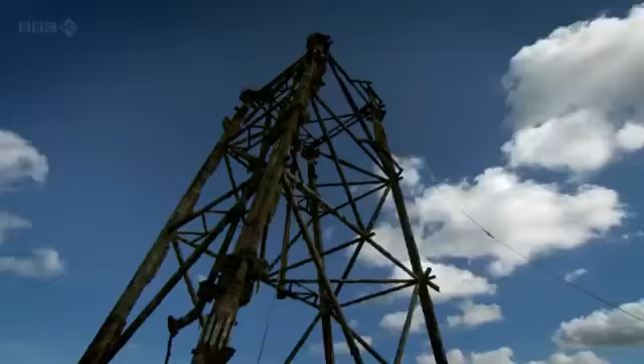Meanwhile, on the other side of the yard, only Lima's legs, or jacket as it's known, still remain. Built from over 1,000 tonnes of high-grade steel, it must be broken up into small chunks to be recycled.

The first stage is to bring the structure to its knees. Strategic cuts must be made so the legs collapse neatly. But it's a dangerous job - as soon as a cut is made, the platform is weakened and may fall at any time.

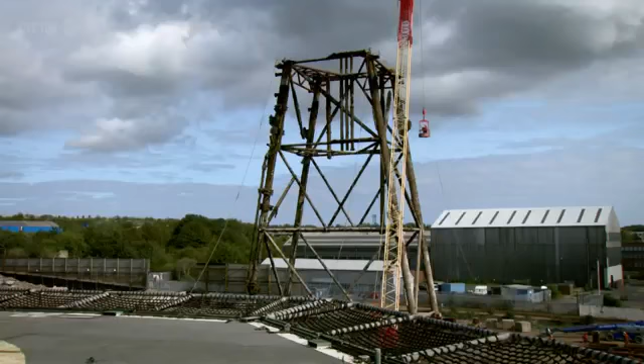So are you guys responsible for felling the legs? Yes, we are. I wouldn't like to be the guy who does the final cut. Who's in charge of that? Whoever wants to do it. The backside gets a bit twitchy when they're cutting the final cut. I could well understand doing the final cut - I think if it was me, at the moment the axe is finished, I'd be turning and running. Do you actually... No, there's no need to run.

In a carefully controlled and calculated procedure, tow lines attached to the top of the jacket will be used to pull it over. This is the first time this method has been attempted anywhere in the world. We attach two ropes either side of the jacket and a safety rope to the very back of the jacket just to stop the back legs toppling the wrong way.

The engineers have put down a bed of earth for the legs to collapse onto, to cushion the impact.

Got two lines, haven't they? Yeah, two pulling lines. These guys will take the tension up on the wire. Just give it a little tug. It's quite exciting, just the anticipation of it before it's going to come down.

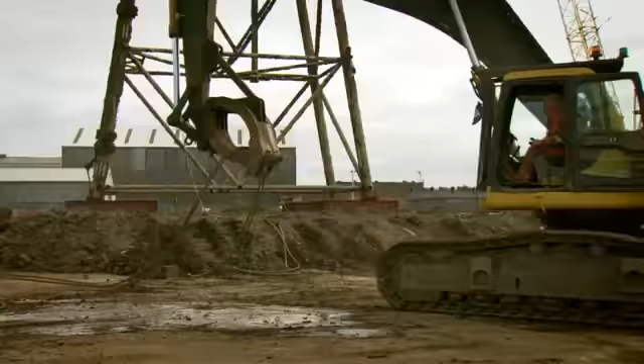Everything clear? Clear. Don't let anything in now because we're about ready. All clear, Mick. If the 30-metre high back legs were to fall in the wrong direction, they could land on a factory behind the shipyard.

Still excited to see these come down? I love it. Brilliant.

Well done. Brilliant, that was awesome. Congratulations, that's the way to do it. The demolition of this jacket for recycling is the final act in the scrapping of the Lima platform.

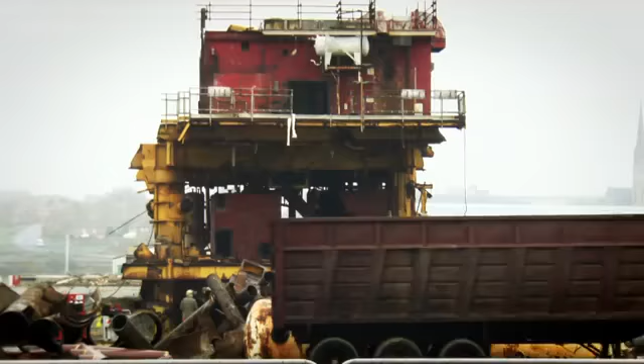Although veteran Lima engineer Austin Hand is working in decommissioning, he has not seen Lima, the platform he cut his teeth on, for 20 years. Well, there she is now. Wow, I'm so used to building things, so to see it dismantled and in pieces is just...

So you're probably quite used to it in this condition, in a sense. I can still see the module, yeah, just on the different curve of its life. Yeah, now that really reminds me of going on and off that barge for months to get it completed, just walking over a gangplank and working 12, 14-hour days every day. But it was fun and exciting, so that gives me a bit of a buzz. We were the young pioneers in those days, we were the ones bringing oil and gas to the UK. It was exciting. Good memories.

So I've seen, Austin, as this process has unfolded, the huge machine of Lima being reduced to small piles of steel rubble, and I was surprised to see so much timber on show. Can you tell me about this? Well, they used to say in my day that the rigs were made of wood and men were made of steel, but that's not actually true. What this was, we covered the main steel deck with this timber, so that when you were lifting stuff off supply boats and landing it on the platform, you had some absorption material that avoided damaging the deck or the container. So all this timber was to provide a huge cushioned area to protect the whole thing, like a massive chopping board in a way.

Absolutely. This steel tubing once formed the jacket that supported the topside. It's now been broken up into sections, ready to be recycled.

But to the expert eye, even these fragments reveal the challenges of these early pioneering designs. In the 70s, sometimes the quality wasn't great. So this is a good example here. Now this is a very tough angle for a welder to get in at these points, you get right down in there. Exactly, so in an ideal world, that brace would have been at a less of an angle, but very often the designers just wanted it to be structurally robust.

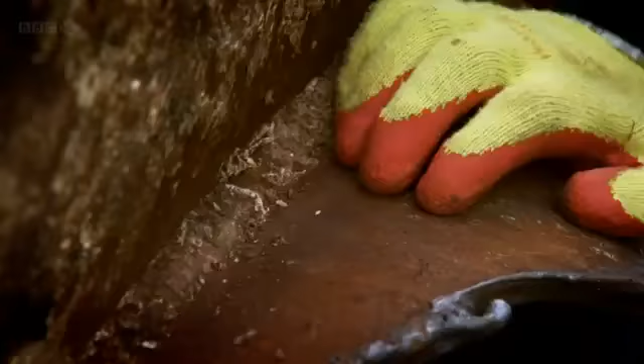And then when it arrived for us to deal with it in the construction yard, you think, wow, why did they do that? And so on paper, mathematically, it makes perfect sense. Exactly, but sometimes it wasn't constructible. But again, this was a learning process that we'd feed back into the next jacket and say, can we do this slightly differently? That's how we evolved the industry, getting better and making it easier to be sure these welds were sound and solid. All these things had to be considered, even with a relatively simple structure like a jacket.

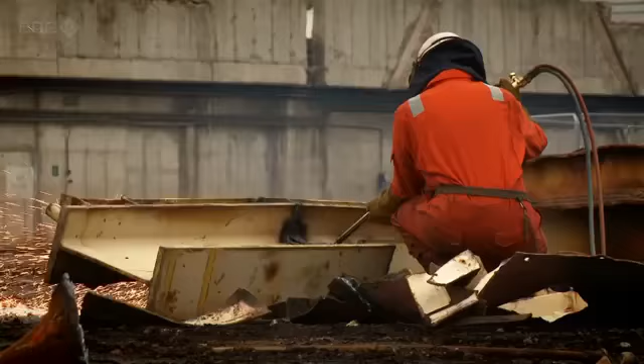For the final time, the excavators pull on Lima's infrastructure to bring down her last storey. Oh, the leg's going to go. There she goes. Very, very sad to see that something that you built when you were a 25-year-old, you're pulling it to bits when you're a 59-year-old. It just shows you time moves on and nothing stands still.

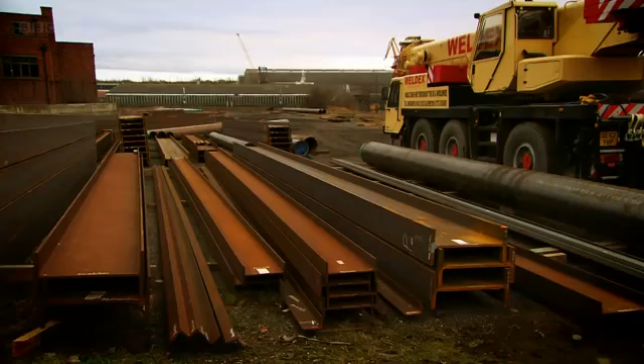Lima is now unrecognizable, just heaps of rubble and thousands of tons of scrap steel. Amazingly, some 99% of this will be recycled. The wood from the decks is pulped and made into paper. Even the 300 tons of algae that collected on the legs will be recycled for compost. But most lucrative is the steel. Once the various grades have been separated out, it's smelted and made into new girders and pipes.

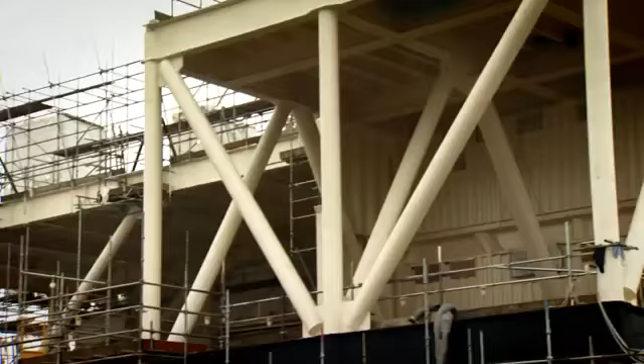Fittingly, just half a mile down the road, steel from the smelted remains of machines like Lima are being used to build this - a brand new 21st century platform. To put it in perspective, whereas Lima weighed a few hundred tons, this weighs in at a whopping 12,000 tons. Platforms like this are giving the North Sea a new lease of life.

But Lima and its gas field are now just a memory. Removing it cost more than £200 million, took 2 years and over 1 million staff hours to recycle 2,000 tons of steel, 311 tons of algae, find homes for 2 generators and scrap 2 toilets and 12 well-worn bunks. And ironically, some of the North Sea Tigers, who pioneered offshore platform installation, are now involved in the biggest new North Sea industry - taking them back down again.